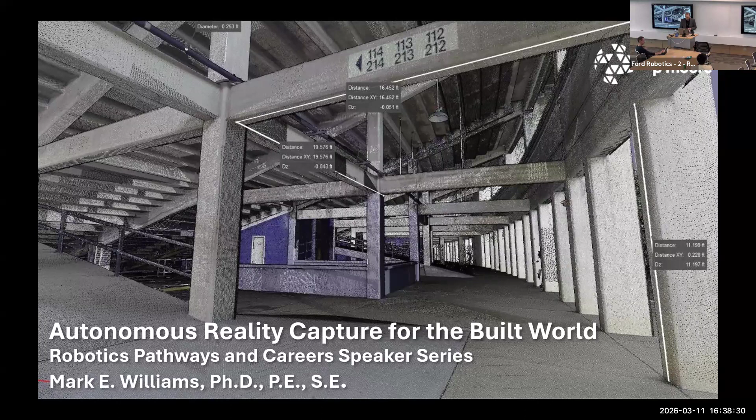I want to start by saying the importance of adopting new technologies. I know it's preaching to the choir here, but from an industry standpoint, innovative technologies enhance our quality of work and contribute to our mission to ensure public safety. As civil and structural engineers, we're charged with protecting public safety at the end of the day. From a company standpoint, from Walter P. Moore standpoint, self-reliance in this technology gives us more market freedom and enables autonomous reality capture opportunities. It lets us be very free to do what we want to do without having to rely on others.

So I said we play in the built world. If you could imagine the built world for a minute, or you let Gemini imagine what it thinks the built world is - I think this is a fun exercise to see what it thinks it is. You have bridges, cable-stayed bridges, dams, ports, roadways, cities, and so forth. All of this is built and needs to be further investigated over time. Interesting that Gemini thinks train tracks just go off a cliff into the water - Thelma and Louise style.

My task and the task of people I work with is to go out and investigate the built world, whether it be a bridge, a building, a dam, and so forth. We really need high quality data capture with that, and preferably want it to be autonomous. The reasons for that are many, but as engineers, historically we used to go to the site and spend a lot of time there note-taking and documenting. We'd get hot and sweaty and cranky and make mistakes and put things in the wrong place. We really weren't using all of our brain power that we went to school for and developed into - we should be making judgments about the condition of things, not being fixated on taking notes and documentation. So we're really pushing autonomous data capture, and I'll get into this more as we go.

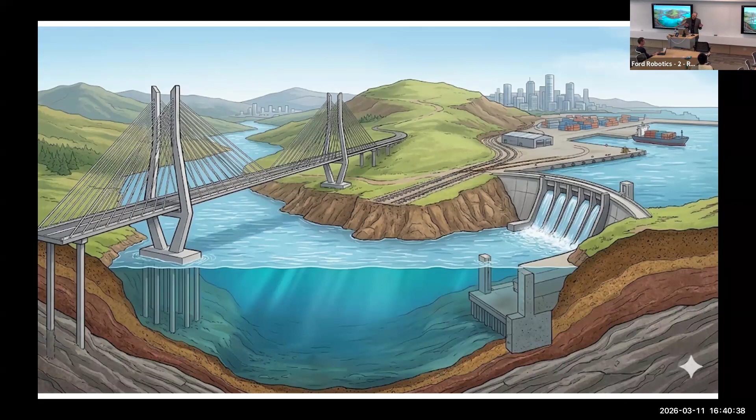From an autonomous standpoint, we would very much like to be able to capture the air, land, and the sea - whole parts of the built world. So let's ask Gemini what it thinks we do for a living.

Not bad, I could critique a few things, but let's take drones, for example. So drones are up in the air. You can use them to do thermal scanning, and I'll get into that in a little bit. You can use them to do bridge inspections. A lot of things you can do with drones. You have LiDAR on them.

You can take imagery. If you are talking about terrestrial data capture on land, you could use rovers, for example. And so it's pretty smart. It's figured out that you're going to drive a rover around, you're going to scan a structure and perhaps look at the foundation, as long as that foundation's above the ground.

And then lastly, we have the underwater data capture. So it shows us a submarine, and it says we can use sonar, we can do pylon inspections, dam base inspections. Gemini's actually pretty smart here. I guess it's figured out our profession without really knowing who we are. But that's generally what we're going after here - we want to be able to capture data from the air, capture it on land, and capture it underwater.

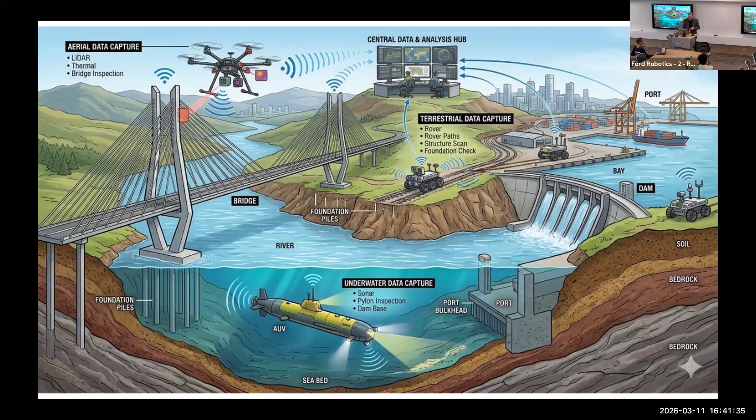We've adopted a digital workflow for this, and I'm going to walk you through this, but this is how we envision it at Walter P. Moore. On the left side, you have data acquisition. Data is coming from a lot of different sources, preferably autonomous sources, and we'll get to that.

So just to run down the list here: aerial surveys, so that would be drones capturing data. Laser-based, LiDAR, so that could be on a drone or that could be terrestrial-based. 360 cameras, great for doing interior scans. Drones are great on the outside primarily. Non-destructive evaluation, so using different tools to evaluate the built world without tearing holes into it necessarily. Various types of sensors, and then lastly we have quadruped robots there.

So little dog, spot, and other variants going around capturing data for us. We're trying to harvest as much data, digest as much as we can, with the goal of building a digital twin or a 3D model of the asset that we're talking about, or assets. So we're feeding all this information in, we're making a baseline 3D model. I'll show you examples here in just a minute.

And then what do we do with that? That's like the so what. Okay, we captured all this data, but what's really important is what the condition of the structure is or what we should do about it. We can do various overlays to that. So we could use AI, for example, machine learning on all the imagery that we took, and we can detect defects. And then we can project those defects onto that 3D model.

We could take the non-destructive testing results, like thermography, thermal imaging, for example, and we can project that onto the 3D model. We could look at as-built construction. So if something wasn't built plumb or correct, we can overlay that as well in the model to see how out of plumb it is or what needs to be corrected.

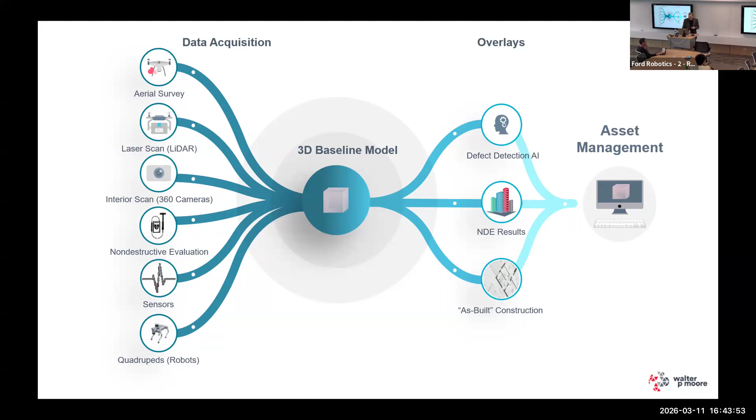Pretty much every owner out there, when you confront them and say this needs to be repaired, they say, well, how long is this going to last? Well, we don't know. We have to be able to do multiple studies and evaluations and look at trends for this. But this is generally the path that we take. And so I'm going to highlight portions of this as we go.

So let's take aerial survey again. This is going to be primarily drones. The platform that we use is Skydio. This is the X10, which is their newest model here. I think you had a presenter not too long ago from Skydio, right? Yeah, okay.

This is a fantastic platform. It's really great for two things. One, we just learned by happenstance. One, we went into wanting to have. The happenstance was this is a US-made drone.

We didn't think about that when we went on the Skydio platform, but boy, is that convenient now because we have lots of federal and government projects where we're not allowed to use foreign-made drones. There's a ban in place as of December 23rd, you can't import new foreign-made drones. You can still use the ones that existed, but not new ones. So I guess we were smart on this one, having Skydio as our primary platform.

The second reason we went into this in the first place was that it's an autonomous drone. It can fly on its own and capture reality for you. You pop the drone up in the air, draw a geofence around the asset you want to scan, and the drone figures out the flight path, the overlapping photos, and the battery swaps. When it runs out of battery, it lands on the target, you swap the battery, and it goes back up and keeps scanning. The sole intent is to capture photographs so you can do photogrammetry, stitching them together to build a 3D model. It's really good at this. Sometimes it gets hung up on complicated geometry, but generally you can put it up in the air, rest free, hold the controller, and watch it do its thing.

It will fly around and help you capture all the data you need. You get 45 minutes of battery life, and you have multiple cameras on this. You can do infrared and visible at the same time, which is pretty cool. You can do a visible model and then overlay an infrared model on it. Great platform to work with. We have about 15 to 20 of these drones deployed throughout different offices around the country, and even internationally. It's been a good platform for us.

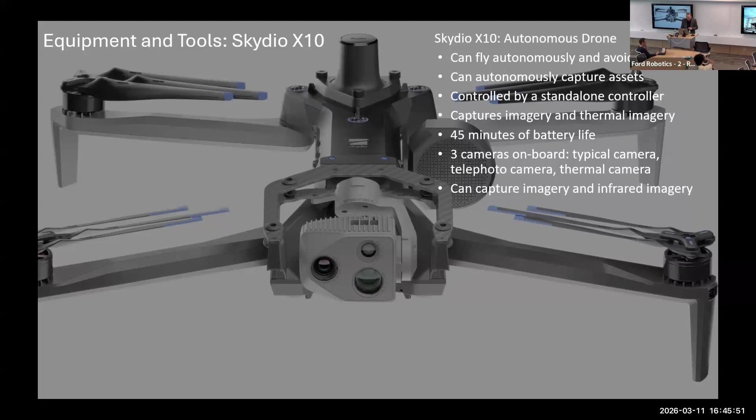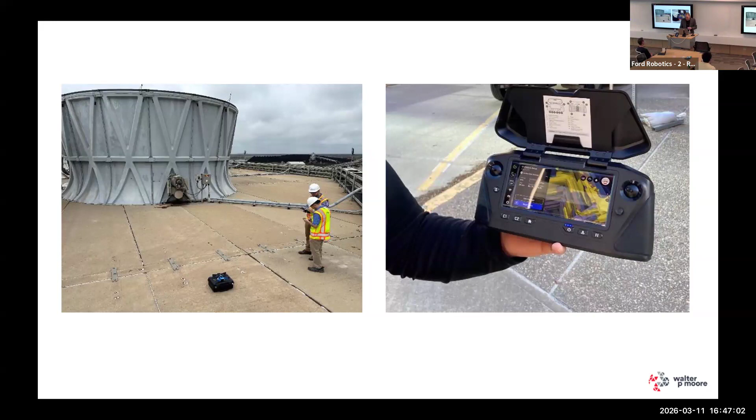You deploy the drone and take thousands of photos for this particular asset. The drone's on the left, you can see it there, and on the right is what the drone sees—its computer vision algorithm, mainly for collision avoidance. It makes sure it doesn't run into anything, but it's also mapping the space so it knows how to autonomously capture it. So it's doing a twofold thing: understanding the space it's imaging correctly, while also not wanting to run into anything. You can just pretend the drone has eyes in that sense.

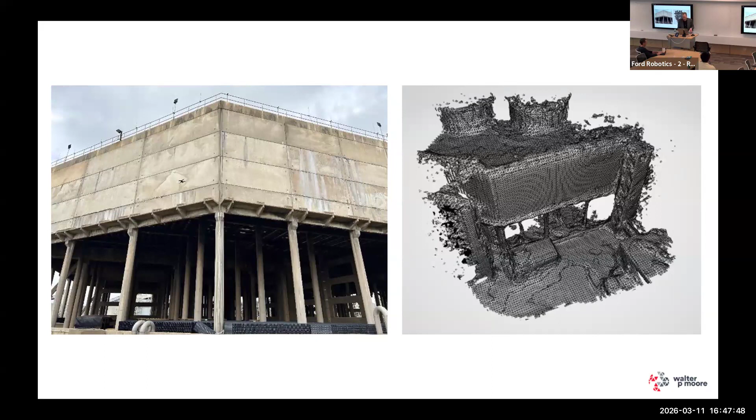The Skydio drone actually has 6 cameras on it, doing machine learning on the fly for navigation. It has GPS as a backup, but it's actually flying on visual navigation, which is handy in places where you're GPS denied. So we're taking thousands of photos, and then running them through our own computer vision algorithms to detect damage and defects.

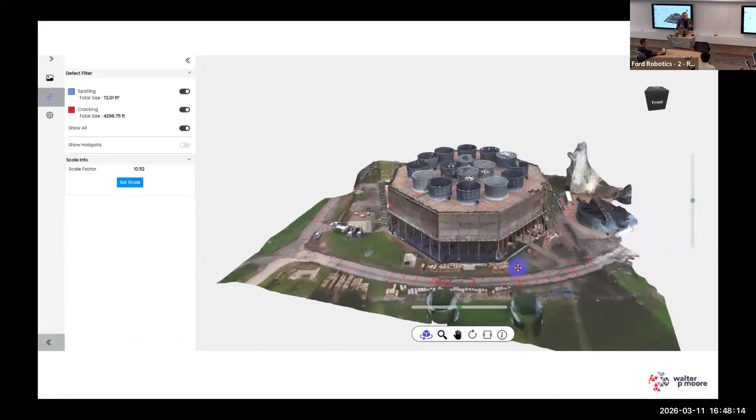We have thousands of photos, we find the defects, and we map those defects onto the 3D model. So in the end, this is the portal I was telling you about. I'll show you a little video here, but basically you have a digital twin of that cooling tower. All of the red you see are cracks that were detected from the machine learning.

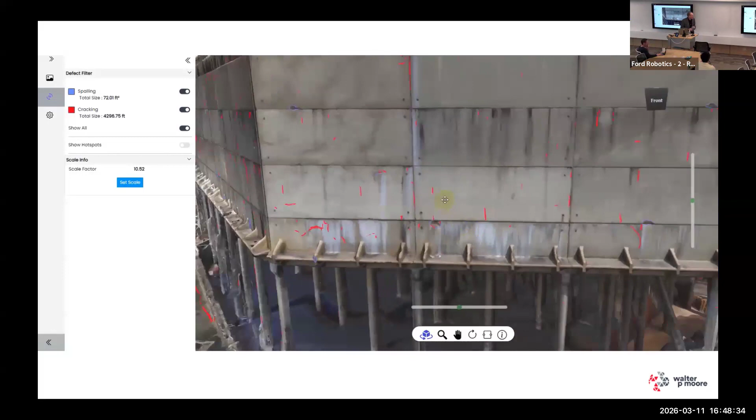As a bonus, you get cracks in the roadway too, because AI doesn't know the difference between the cooling tower and the road. So you get a full mapping of all concrete cracks. You can zoom in, zoom out, interrogate it, and pull up the photos that correspond to particular defects. The beauty of it being machine learning based is you also get a quantification of how many cracks you have, their lengths, as well as concrete spalling, areas of concrete that are deteriorated that you have to repair.

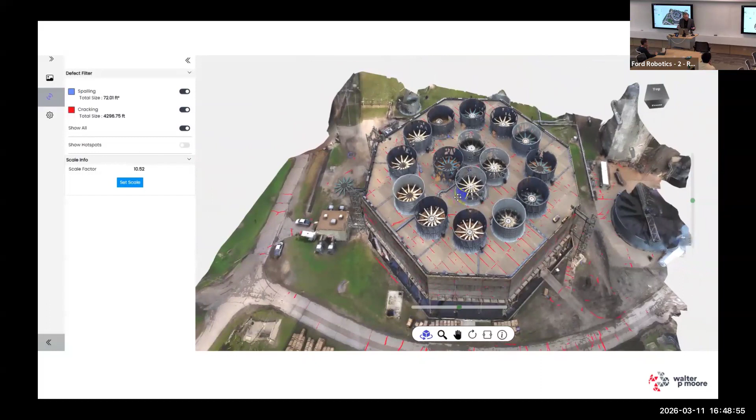You get that all in a nice little package, and you can look at this from the office, your desk, or a remote place wherever you are. You don't have to be out in the field all day, every day, trying to get all of this documented. So this is the beauty of having it be autonomous.

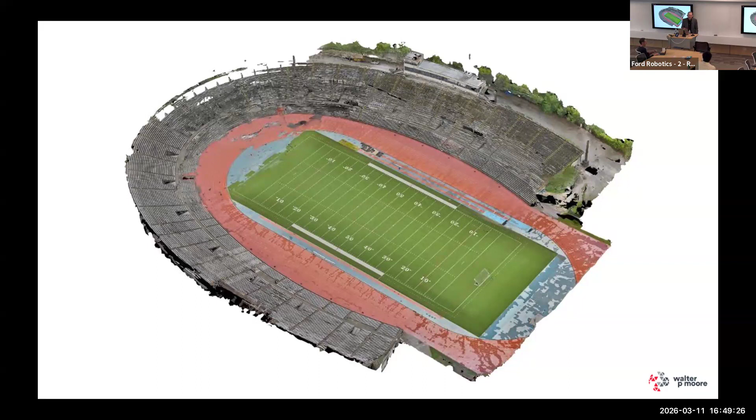It's not just cooling towers. We've done stadiums as well. So this happens to be a sports stadium, and this was all done by drone. You're talking about thousands of images, stitching them together, capturing it, building the 3D model, which is the digital twin. And then from there, you can do detection of defects, cracking, spalling, and so forth for concrete.

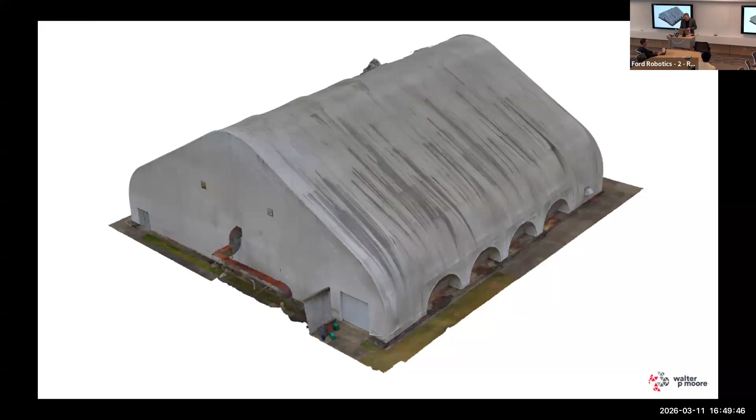I've also looked at institutional assets. So here, this is at a university, a classic brick masonry building. We have a digital twin of it, and you can spin it around, interrogate it. You can look at defects in masonry, which is cracking and spalling. I'll go through those in just a minute.

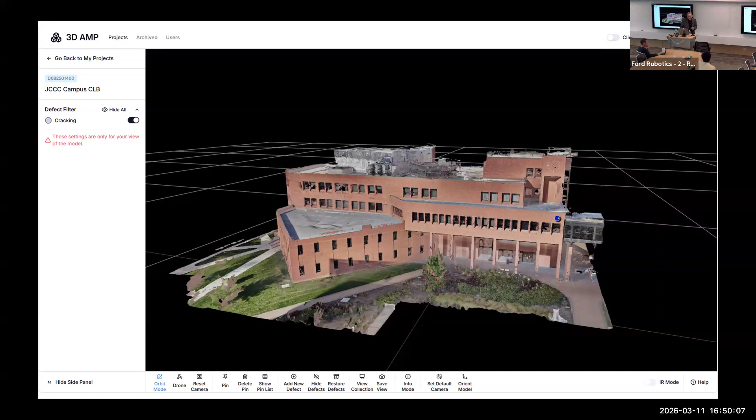Also adaptive reuse. So this is an old church, being used for different purposes now. You build a 3D model of it, and now you have that. You can interrogate it for damage defects, but you also have something nice, true to scale. So if you wanted to modify this in any way, you now have all that information.

In my profession, a lot of times we do not have drawings for things. Once something is built, for some reason they just throw them in the trash and you never have them again. They keep the mechanical, electrical, plumbing drawings forever because they have to replace systems inside, but when it comes to the building structure, they seem to toss it when they're done. So a lot of times we have to go through a process we'd call building as-builts, making new drawings that don't exist.

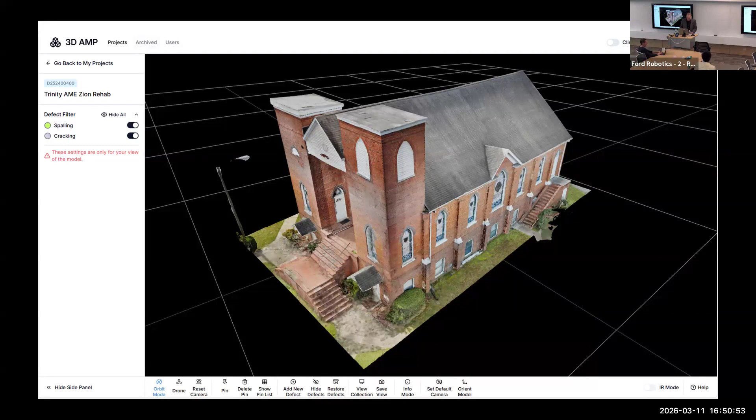It also goes to transportation assets. So if we wanted to do a bridge inspection, we could fly a drone, take lots of photos, stitch those together by photogrammetry, and then in our own comfort and leisure, go back to the office and actually do an up-close inspection of this. You can look really close, very nice high resolution here. You're not dodging cars, you're not having to close lanes.

Oh, by the way, because you have thermography at the same time, you can turn that on and look at this in the infrared spectrum as opposed to the visible spectrum. As it turns out, you actually see more concrete defects in the infrared spectrum, and that's because the heat signature is a little bit different when the concrete is going to pop off than when it's intact. So it's a fantastic tool for that.

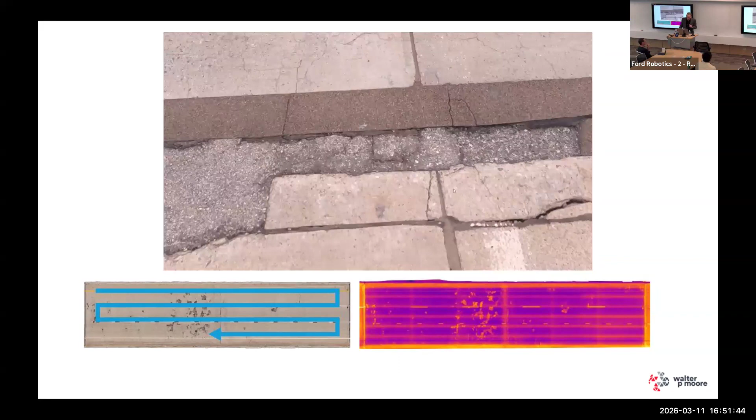You can see the infrared spectrum down in the bottom right, and the bottom left is just the path that we took. Is it residual rubber from the tire tracks, or is it like indentations? That's a poor asphalt job there. Oh, are you talking about the infrared?

Yeah, so in the infrared, the bright yellow you see is the beams underneath. They have a different heat signature than the rest of the deck because of different thickness. The deck is 8 inches thick all the way across, while the beams are 6 feet deep. So you're picking up the beam lines. It's really cool.

You can pick up metal studs in buildings. You can pick up all kinds of things, even your own footprints with thermography. It's kind of fun to be a detective.

Somebody at some point should ask, where are the cars? So this is a fun little story here.

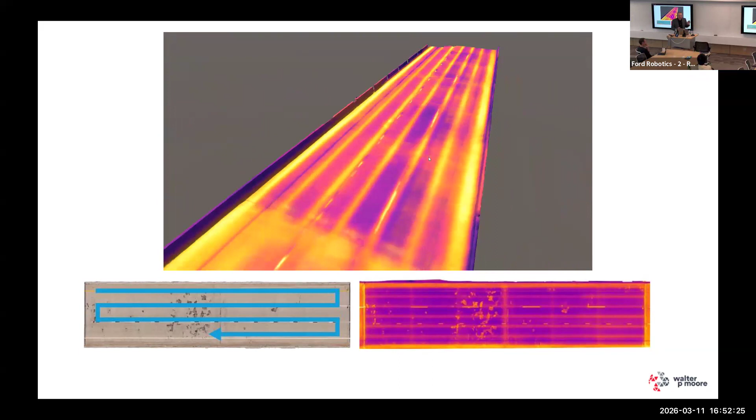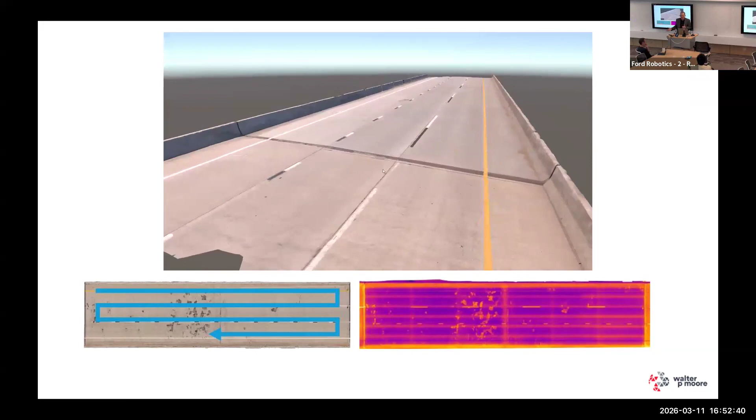You're not supposed to fly drones over moving vehicles. This is typical DOT policy. You're not supposed to fly over crowds as well. We actually flew this on a less occupied bridge, off hours essentially. But when cars were coming, we moved the drone out of the way, and then we brought the drone back and kept going. So this was not a one shot, but it does take about 10 minutes really to do all this. It's not a very long process, you just have to get out of the way of the cars when they come.

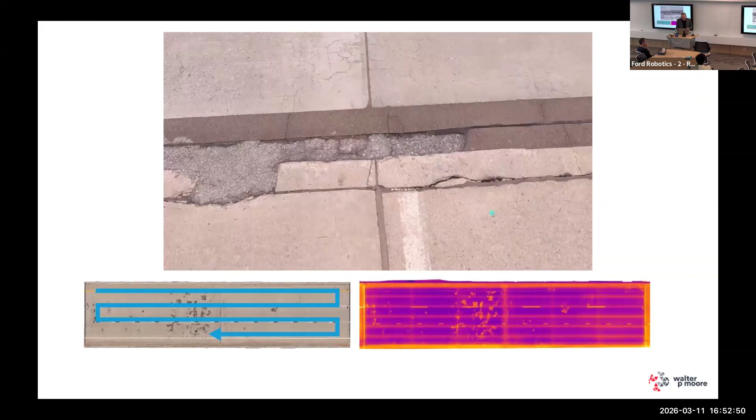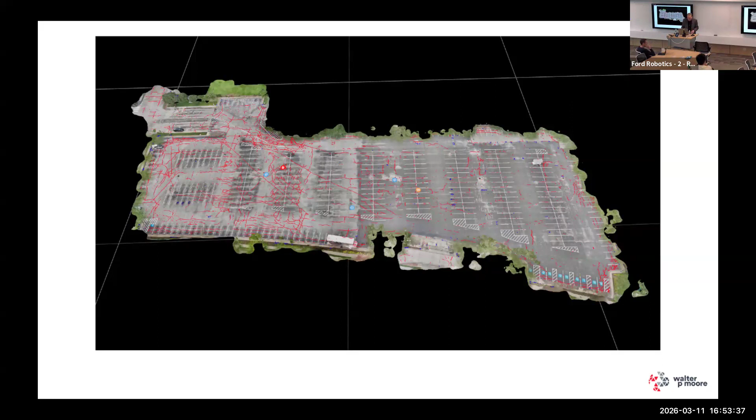Just to touch briefly on machine learning. There are different types of materials of construction, and we've trained up different AI models on what concrete does when it misbehaves, when it deteriorates. If concrete does that, it cracks and spalls, the reinforcement's exposed, you get efflorescence, which is a white staining that occurs, and corrosion staining from all the rebar that's exposed. We've trained it all up on concrete, so when it sees concrete, it automatically marks those defects and maps them to the 3D model.

Tensile fabrics we are working on, there's a whole different behavior there. With a tensile fabric you have tears, punctures, worn top coats, hard creases, seam delamination, and it's a lot harder to do it with computer vision on fabrics than it is with concrete, I'll tell you that. So it's still in development, we are working on it.

Masonry, which is like your typical stone masonry or brick masonry, you're going to have cracking, spalling, efflorescence, and corrosion staining. We've got that one down pretty well, all trained on photographs of actual distress. So we have a whole library of distress to train on. Natural stone is really tricky because natural stone has all kinds of defects in it on purpose, that's why people love it, it looks so beautiful, right? Well, it has inclusions and defects in it, so it's really hard to train on what a defect is.

And lastly, steel, we'll get to in the future. Steel just kind of rusts, there's not a whole bunch to it other than rusting, so we'll get there at some point. But just to give you a flavor of the different materials and what we're looking for.

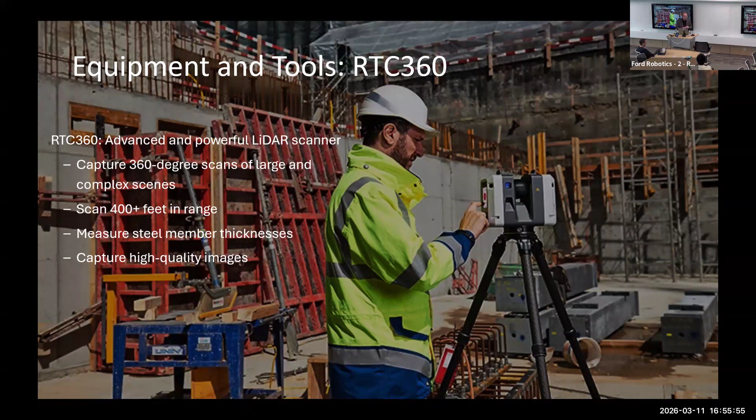This is a high-end laser scanner. The other end of this is the BLK2Go, which is a handheld mobile laser scanner. If I wanted to scan this space right now, I could simply just walk around the room really quick, and I have a point cloud of this very fast.

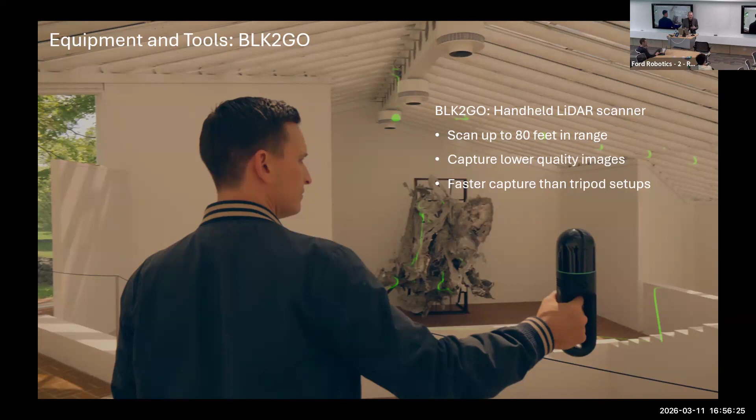You can imagine you could mount this to other robotic platforms as well. There's a variant of this called the BLK Arc, which you can put on Spot, or you can put it on rovers, all kinds of things. Basically integrated SLAM, so it's building the point cloud. It knows where it is in space as it's going. It can take pictures and tie those to the point cloud. Pretty cool technology.

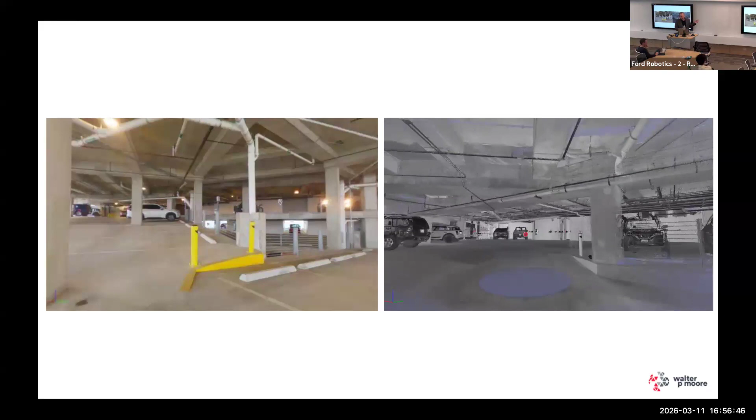In the old days, I make myself sound old here, but on the left we would walk a parking garage to find defects and all that, and we'd take a picture. Well, in the modern era, we can do this with laser scanning. Now we have a digital twin, we have a 3D model of a garage. Before we just had a photograph, and invariably we forgot to take a photograph of something, and then we're stuck. Now we have a full model.

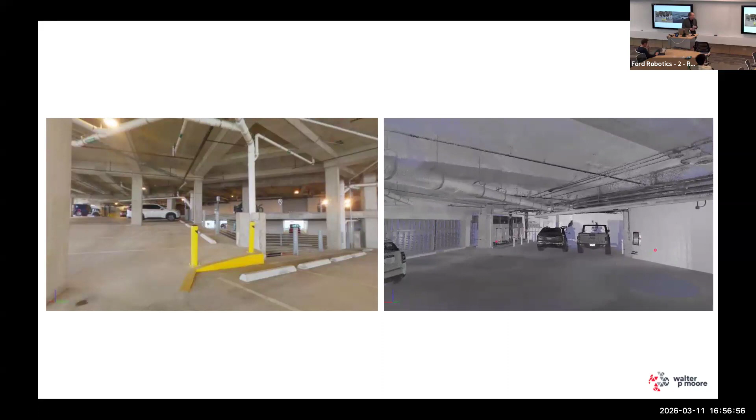We can do a walkthrough, we can interrogate it, it's dimensionally accurate, we can do whatever we want with it. That model could be created by a quadruped, it could be created by a rover. There are many different platforms that could go through this type of structure. So that's kind of exciting.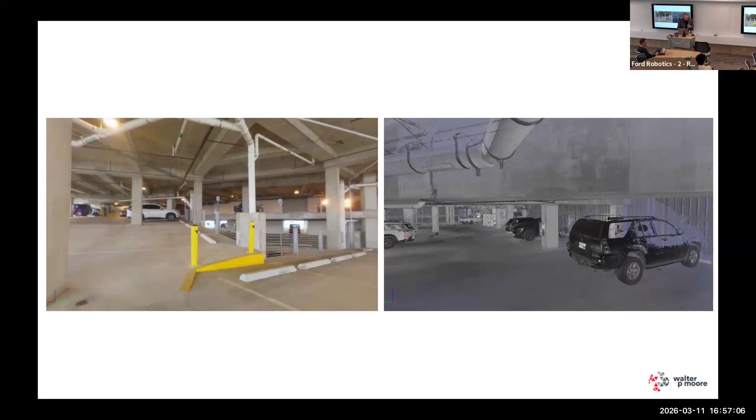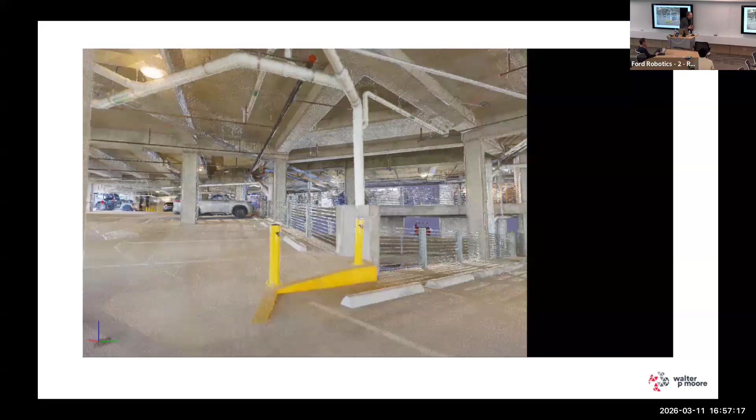But let's take that one step further. Here's a colorized point cloud that was created. Now there's a particular advantage of having this, and I'll show you in just a second. You can use AI to classify different components within that garage. The AI algorithms are trained on what pipes look like, what columns are, what beams are, any parts of building construction - windows, doors, you name it.

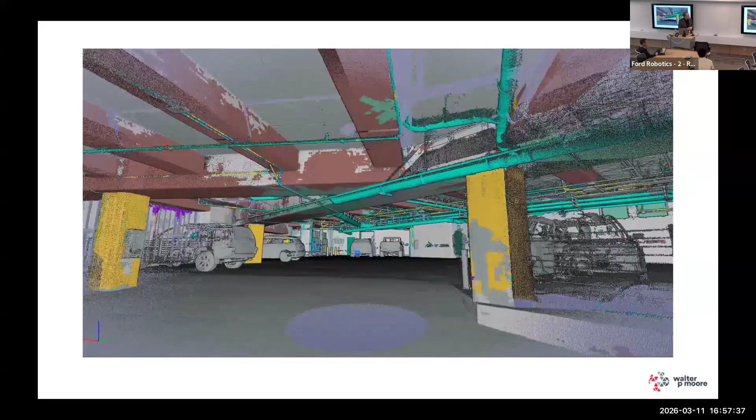So now I can do a walkthrough here, and it's pretty good. It's not 100% perfect, but it can identify all the different features in the garage. So if I just wanted to know the pipe layouts, I can isolate those. Or if I want to know the framing, I can isolate that. So you can pull all this apart. That's all detected by machine learning. Pretty cool.

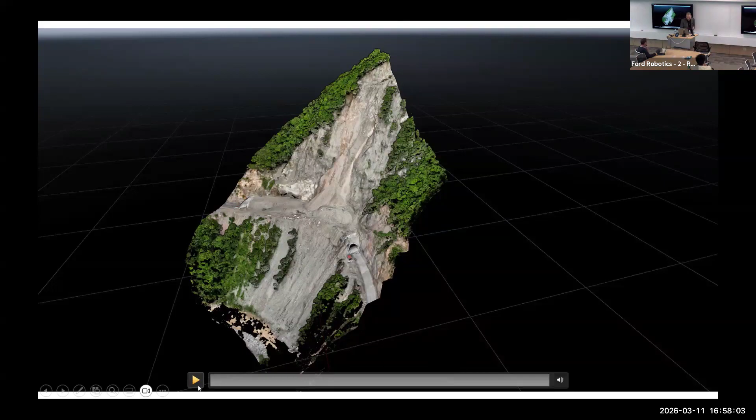All through a process called classification. There's another interesting one - we got involved looking at a landslide. And there happens to be a tunnel where the landslide occurred. The tunnel was mainly to protect from falling rocks or debris and things like that. But as it happened, the landslide actually occurred above the tunnel and actually punched through the tunnel.

So here we are investigating this, trying to make sense of it. The model that you see there is LiDAR. So that is a point cloud that is colored to look like an image, but it's not an image, it's just millions of points. But it looks amazingly good. And the beauty of that is that it's dimensionally accurate.

So if I need to get measurements about where the tunnel was damaged and how and why the landslide occurred - you can think of many other scenarios here - I can get that. This was taken off of a drone as well, so that's LiDAR from a drone, which you give up a little bit of accuracy on just because of the mobility of it. But that looks amazingly good for what we would do.

So you can take the point cloud, you can cut cross sections through it, you can take all kinds of measurements, quantities. If you want to know how much land is there on the slide, the dirt that's on the tunnel, you can definitely calculate that. There's a lot of good opportunities when using LiDAR.

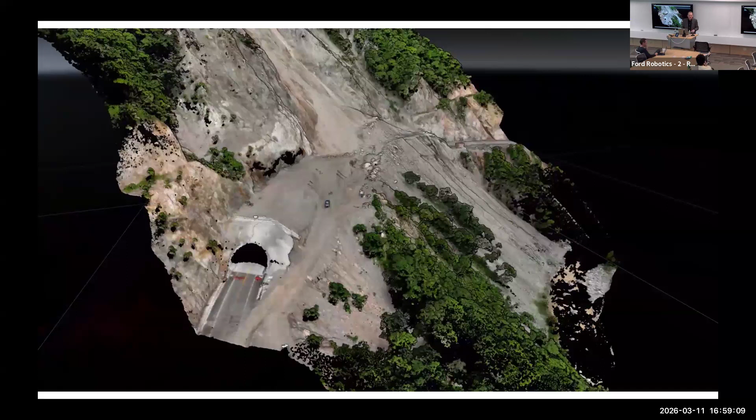All right, and then quadrupeds. Let me just touch on these, and then we'll tie all this together. So quadrupeds, we've invested in Unitree's Go 2. This is a good entry point for us just from a cost perspective. We priced out Spot, and if it has everything we wanted, it's like $150,000 for Spot.

I think he looks really cool, looks great on commercials and all that, but we can price this out at $20,000 versus $150,000. You buy 7 of them, you got to start here at least, learn the craft, right?

So this is Max, our mobile autonomous Explorer, with the X in Explorer there. He's the Unitree Go 2 EDU edition, so he's got the extra compute on him. Does have LiDAR and the stereo vision camera. It actually has 2 LiDAR scanners, because one's in the snout and one's up on top.

The one in the snout's done for navigation. The one up top is what we're using to capture the built world and do our LiDAR processing. Jetson Orin processor, it's a little taxed. It'd be nice to get the Thor processor in there. We're hoping that maybe they'll make that move here pretty soon.

And you look at it, you're like, 100 trillion operations per second, wow, that sounds really fast. And then you start processing all this data in there and you realize, oh boy, this thing's dragging.

Weighs about 30 pounds, which is actually a good spot to be in, because we have to go deploy this. It can't weigh 150 pounds for us. We would never be able to get it to a job site in order to do the evaluations we need to do, at least not easily.

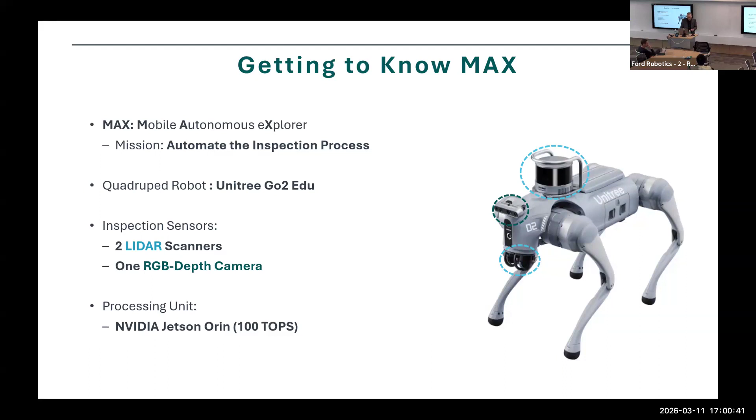There are 2 pieces to what we use the quadrupeds for. One is for mapping and navigation. The second is for the AI vision model. So the intent here is that Max walks the space. As he's walking, he's capturing it with LiDAR. He's also using the cameras in order to detect defects. And then he will tag those defects to the point cloud. So now we have an as-built of the space, which is dimensionally accurate, but it's also tagged with all the defects that it sees as it goes through.

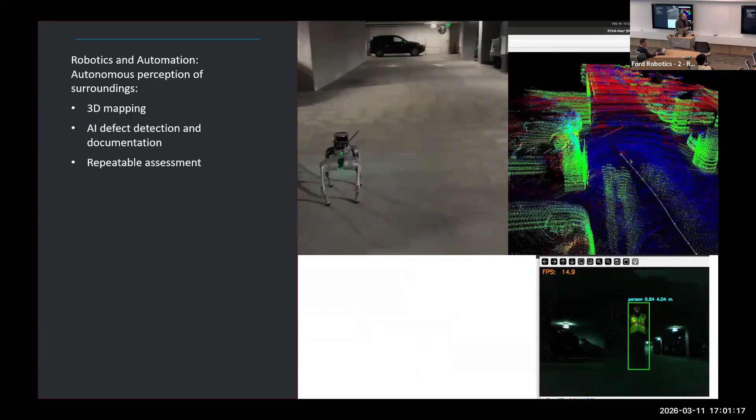Here's Max in action here. Sped up the video a little bit so he doesn't walk that funny, but it gives you an idea. On the right there is the point cloud that it is building in real time as he walks.

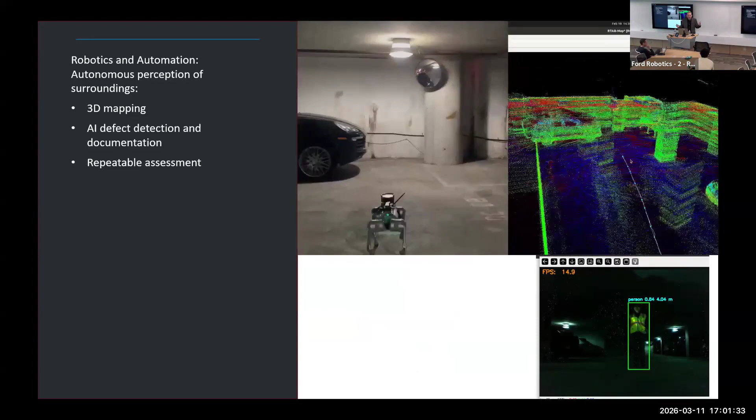So dimensional 3D mapping is an application, defect detection. This is very repeatable. First time he walks the space, explores it, now it's all mapped out. Now I can draw a path for him, or I can tell him to go do this again one year later, and then we can make comparisons about what's occurred.

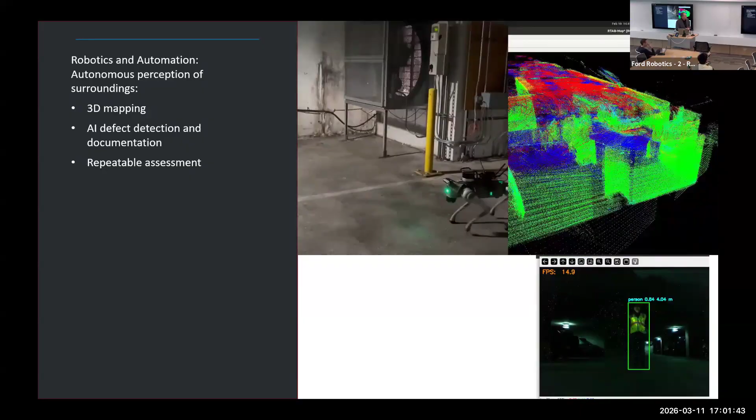Max is really excited. We'll let him finish up there.

Down at the bottom right, this is just us playing around, but we have computer vision going on where Max is identifying a person. So he's using object detection, and he's identified a person with a certain amount of confidence. We are training Max on identifying defects, all different types, and then we'll map it just for fun to show you he found a person. He found his master, his trainer, as he went.

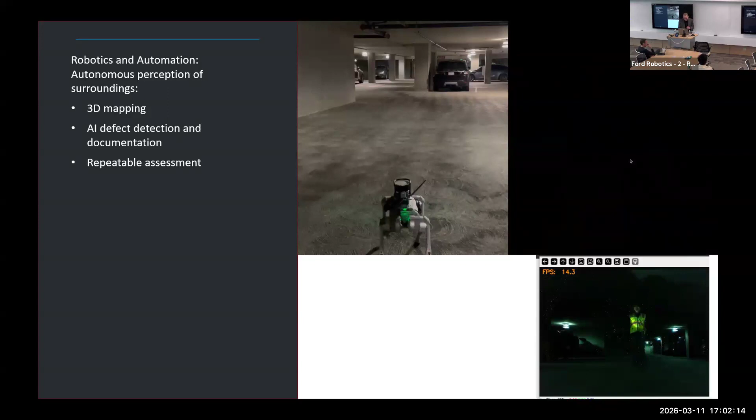This is the garage that they were walking through. This is the point cloud being processed here. You can kind of get a sense, you can see the cars in there, the columns, and so forth. We'll clean it up even more to make a full model out of it, but just to give you the sense of it as we go.

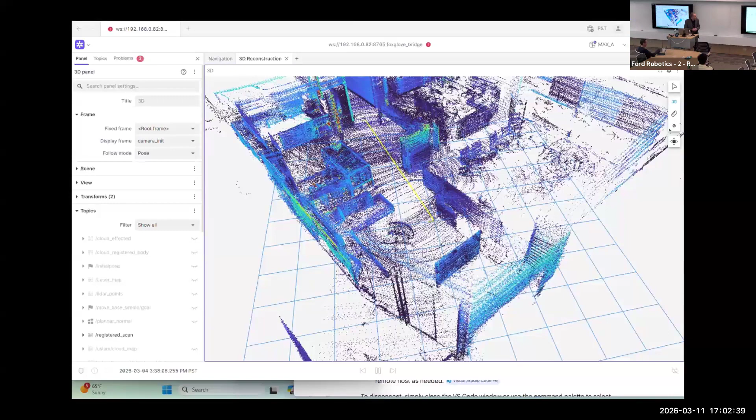We took Max to one of our offices, and Max decided he wanted to map out the space, as any good quadruped would want to do. So it took him 6 minutes to map our office. You can kind of see the vector that he's walking here, and he's building the space as he goes.

I say he, but we have Maxine coming soon. Maxine's going to be on wheels with the feet, be a roller type, but very fast for building the space out.

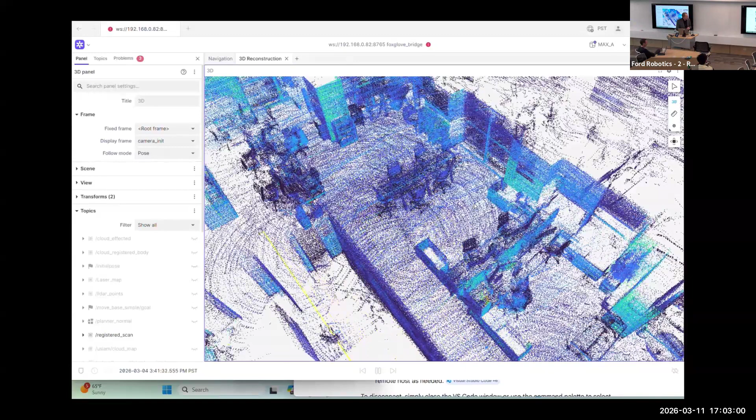And of course, then you can tie that with object detection. This particular demo we were doing here, Max was finding potted plants. So when he found a potted plant, he would tag it and mark it to the point cloud.

So we start with the Go 2. We'll probably make the step to go to the more enterprise version of this, which is bigger, heavier, huskier, but better battery life and ruggedness. But you have to ask the question, how long is it going to be before we go to 2 legs here?

Well, if we're at 4 legs now, this is probably going to happen fairly soon. We don't have anything purchased at the moment, but I was talking with Damon about this earlier. It's really fun watching kung fu videos online or watching them dance, but there are some very practical applications for us where it could walk through structures, particularly a hazardous structure, a tunnel, something you don't want to be the first one into. It can definitely do it for you. It doesn't get tired, complain, other than it runs out of battery, so you just swap the battery and keep going.

Again, focusing on autonomous data collection here. We don't want to be the ones, humans, out there at the site doing all the collecting of data. Let other platforms do that.

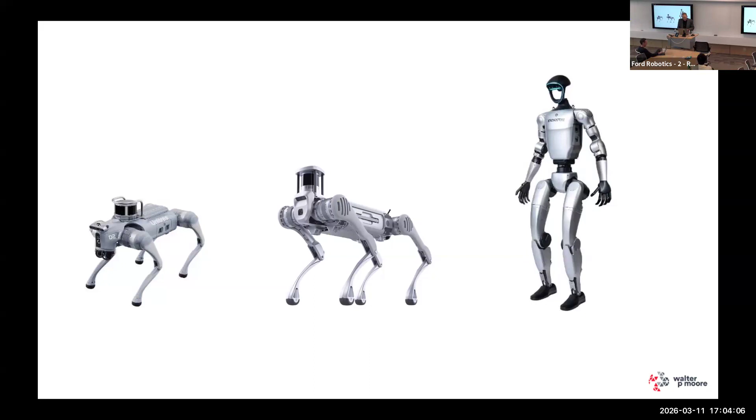All right, so now the important point, robotics fellow wanted. Why I'm here is we are looking for a robotics fellow to build autonomy that captures reality and powers computer vision for the built world. So I have 4 projects in mind, and I want to talk through them and then get your thoughts, and we can have a more robust discussion around all that. But things that we're looking for right now in this space.

One is an extensible drone. By that, I mean we have Skydio, we like the Skydio platform, but it's very much a closed system. So if we want to deploy computer vision on the drone, we can't do that. The Skydio drone is flying, taking pictures for us, we have to come back, build our 3D model, and then analyze all the photos. It'd be really nice to be able to do object detection or different types of ML on the drone and just be able to extend it in different ways. Right now it is what it is - it's a box, you fly it. We want to be able to do more development.

We do have an NDA with Skydio, we do have advances on their releases, we have talked to them about this. Understandably, they want to keep some things guarded. So we're looking at an alternate platform as well. Not that we're getting rid of Skydio by any means, but do we have an alternate platform that we could extend? So that's one idea.

Rovers - so we have quadruped, but it would be nice to have a rover as well. There are some advantages of each, but we need a lightweight rover, something easy to deploy at a site. By lightweight, I mean under 30 pounds, something you can just have in a Pelican case, bring it out, deploy it, be able to do reality capture, typically inside - like this space, or this whole floor. Be able to go autonomously, use LiDAR, use computer vision with cameras, detect defects, and package that all up with a SLAM algorithm.

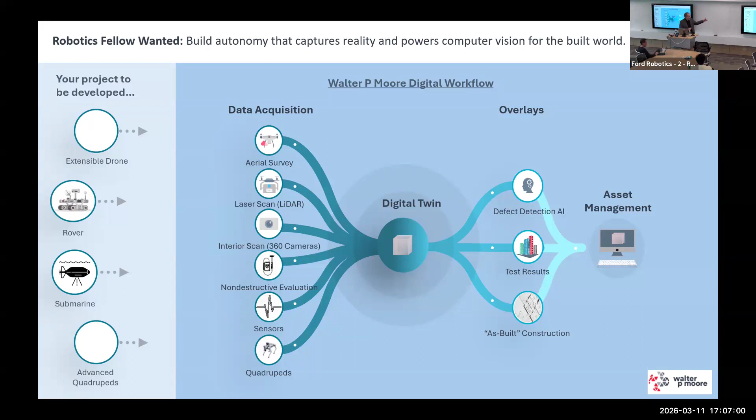So those are kind of the four general things. Those feed into that same stack I showed you, the digital workflow - the data acquisition piece, now we're just adding new bubbles into there to collect more data in order to build our twins, do our overlays, and do the asset management. So let me walk through those just a little bit more in detail.

So the first one, in number order here, is to build a lightweight autonomous rover platform for capturing LiDAR and photogrammetry of interiors - that's not lightweight, by the way, that's what AI thinks lightweight is. So that's ClearPath, that's us, right? And it's still too bulky for us, so it needs to be lighter than that.

Still want it to be ruggedized, still want it to be able to explore the space without breaking, go up and down ramps, things like that. But it needs to be something that's in a case. You can just take it out, deploy it. Preferably you have a tablet interface and you just deploy it and it goes, and it autonomously explores and you can look at the tablet and see that it's collecting data. You're probably not going to build the whole point cloud on the fly. That's okay, we can do that later, but just make sure we're collecting data.

Second one: provide development support for an engineer working on an autonomous quadruped platform for capturing lidar and photogrammetry of building interiors. You can use the quadrupeds outside, but we found the drone is the perfect platform for outside. What you really need is interior scanning a lot of times. And it doesn't have to be a building, it could be a stadium, it could be many different types of structures. They all have some sort of interior that's kind of hard to fly a drone in. We can, but there are other platforms that are more efficient about it. So we'd like to do continued development on the quadruped.

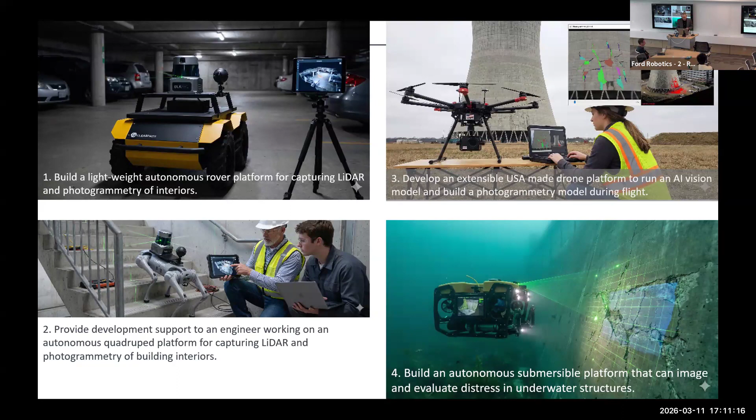And so with that, we want to go to discussion.

Before we go to discussions, let's give a quick round of applause. That was great. Yeah.